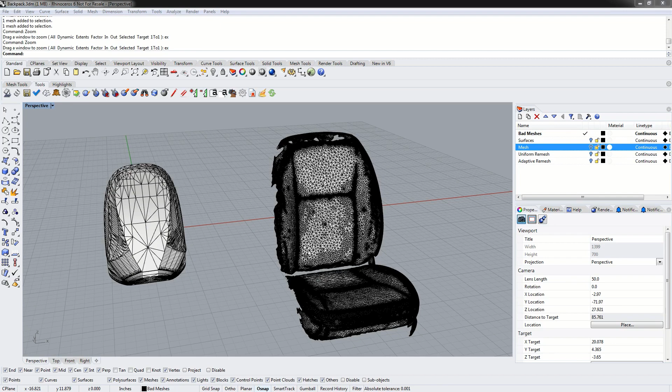Hello and welcome to this video on what makes a mesh good or bad. In this video we will show two different styles of meshes.

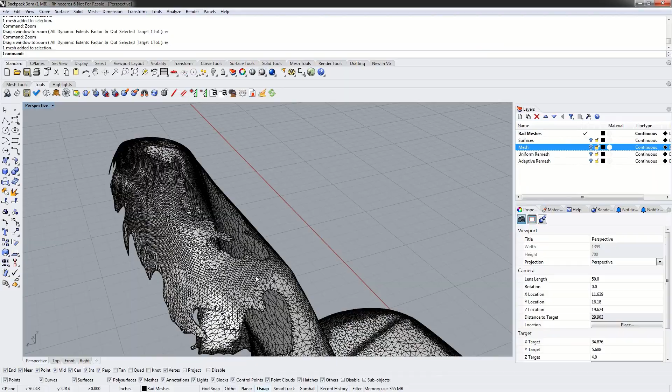The first mesh on the right is the result of a laser scan. As we can see, this mesh has a lot of triangles, and when we start looking at the edges, they are not smooth straight lines as we would expect from a pattern piece. This is what's referred to as ragged edges. The mesh also has a number of holes in it.

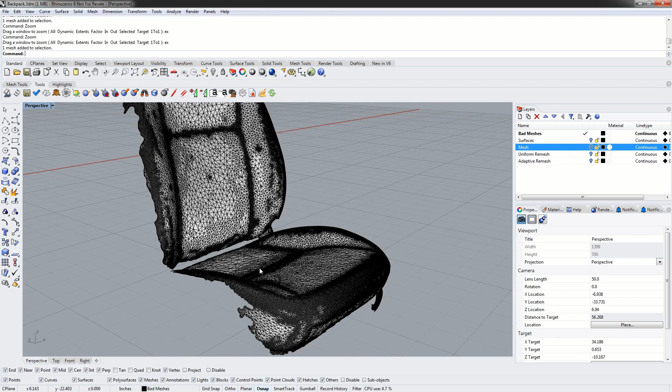If we try to flatten this with ExactFlat, we will get a pattern; however, it will not resemble the pattern that you would expect. Although you can clean this up and fix this mesh in Rhino, it is best to use the tools that come with your 3D scanning package to fix up the mesh. Your 3D scanning software will have specialty tools for trimming the edges, filling in holes and splitting up your mesh.

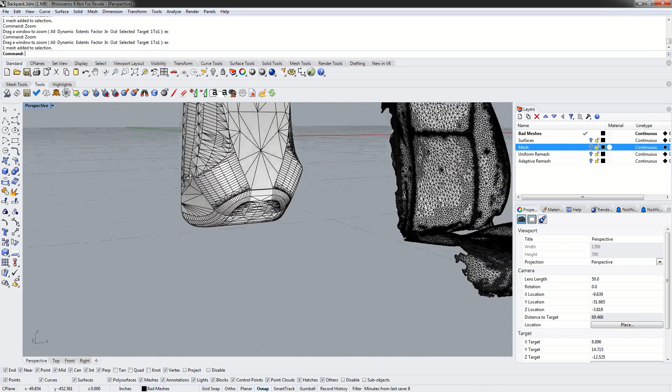The next mesh we're going to look at is the result of Rhino. This mesh was created by selecting multiple surfaces and using the Rhino mesh command. When we start looking at the mesh, it doesn't look too bad. However, if we start examining the mesh closely, we can see that we start having holes in the mesh. We can see right through the pieces.

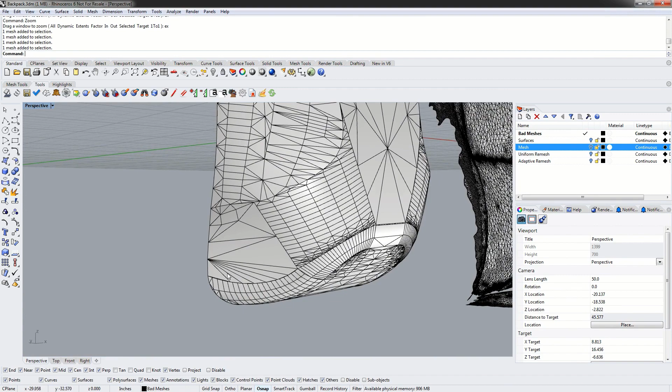When we start looking at the triangles themselves, we have very, very large triangles that are right up next to very, very small triangles. We also have a collection of very high aspect ratio triangles. That is, triangles that have very, very long edges along with very, very small edges.

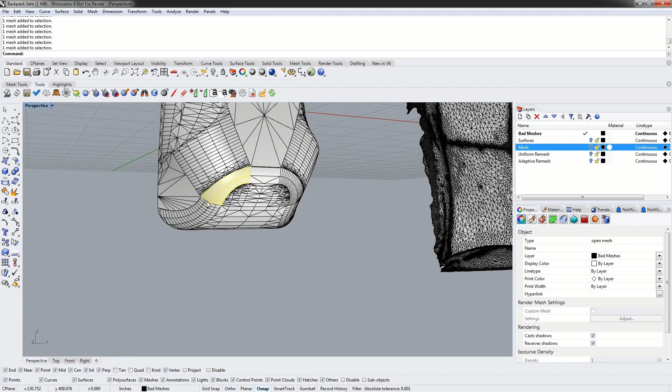Also, because these were individual surfaces that were meshed, if we start examining the edges, we'll notice many instances where the triangulation along one edge does not correspond to the triangulation along the opposite edge. Although ExactFlat will do its best to sew these together, it's not always guaranteed. As such, this would be considered a bad mesh.

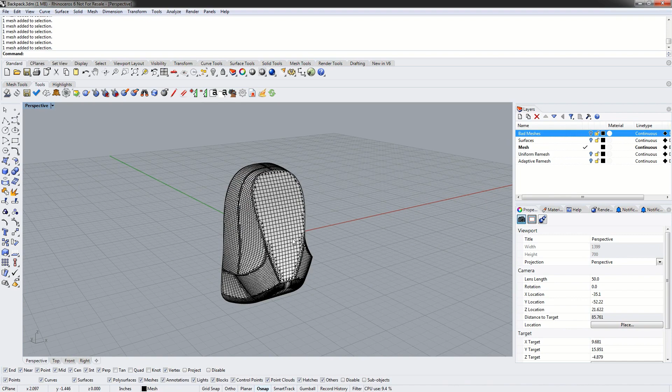An example of a good mesh is one that has uniform triangle distribution and all the seams or joints between the meshes are consistent. This mesh was also created using the Rhino mesh command. However, before we created a mesh, all of the surfaces were joined together to form one closed polysurface. We then used the Rhino mesh command, went into the detailed controls and manually specified maximum edge length.

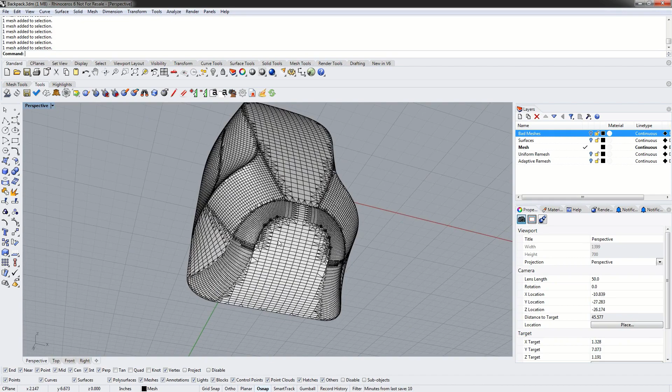This is how we were able to create a grid of triangles and quads on the back and on the front. We have limited the ability of the mesher to create triangles with a very high aspect ratio by manually specifying the mesh parameters.

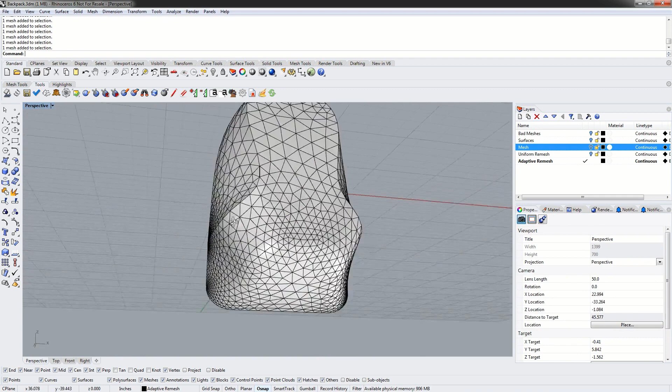Once you have your meshes created, it is best to use the Adaptive Remesher to reprocess your mesh and create an even further refined mesh for use with ExactFlat. The Adaptive Remesher will ensure that all the triangles are more or less equilateral, and that when a change in triangle size is required, a very smooth gradation of triangles is created to accommodate it.

ExactFlat will only add additional triangles where additional detail is required, such as to accommodate complex curvature or very sharp angles in the mesh.